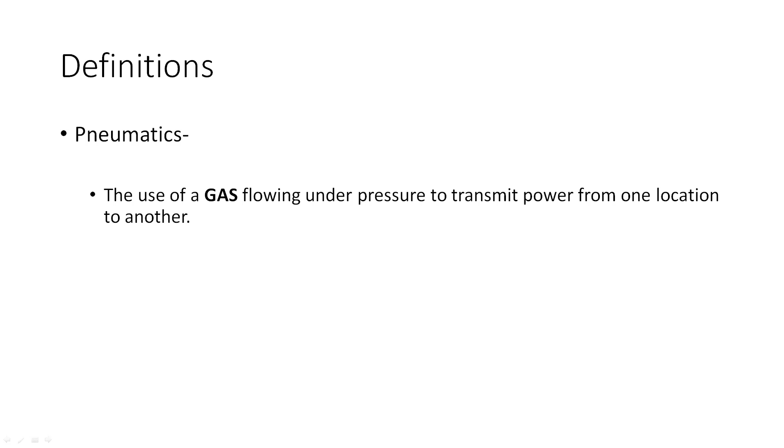Now, the most common gas, obviously, is air, and that's what pneumatic means. The reason is, first, it's relatively simple to control. You can make discrete things that move back and forth or actuate in a line, some kind of linear actuator, really easily. And the big advantage on robots, like on an FRC robot, is that you can have one power source control many applications.

By that, I mean you can have one compressor and reservoir system connected to several different solenoids to drive several different actuators in completely different directions. So if you need to power a lot of linear devices, pneumatics is probably a good solution for you.

It has a reasonably high power to weight ratio, meaning that I can get quite a bit of net power out of the system for the size of the motor that's driving it. And that's by virtue of the compressor storing some energy in a reservoir in the form of high pressure air. And the last thing, it's really safe.

Now, when you talk about safe, it doesn't have some of the inherent risks of hydraulic fluid, like flammability is one, or another one, probably less often thought of, is if I have an air leak, I just leak air on whatever I'm working on.

So if you went to something like a food processing line and you had actuated devices on that, air would be a good choice because, again, if we leak air on the food, the medium doesn't get destroyed. But if it was a hydraulic system and we leaked hydraulic fluid on it, we would destroy the product. So it's pretty safe from multiple perspectives.

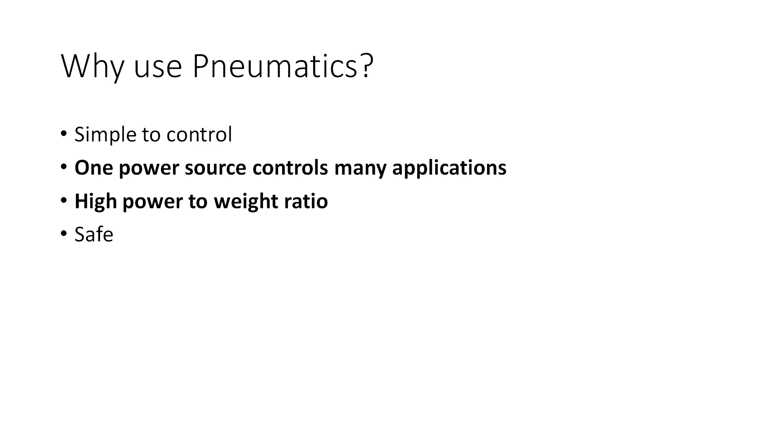So when we talk about typical pneumatic components, this is what we're going to look at, and we'll look at these in the sense of an FRC system. So we always need some way to generate or convert our energy from electrical or mechanical into compressed air.

So when we talk about converting mechanical power to air power, really what we're doing is we're typically going from electrical power through a motor to mechanical, through a compressor to air power. We also typically need to store our air power, under pressure, typically a pressure higher than what the system uses it at.

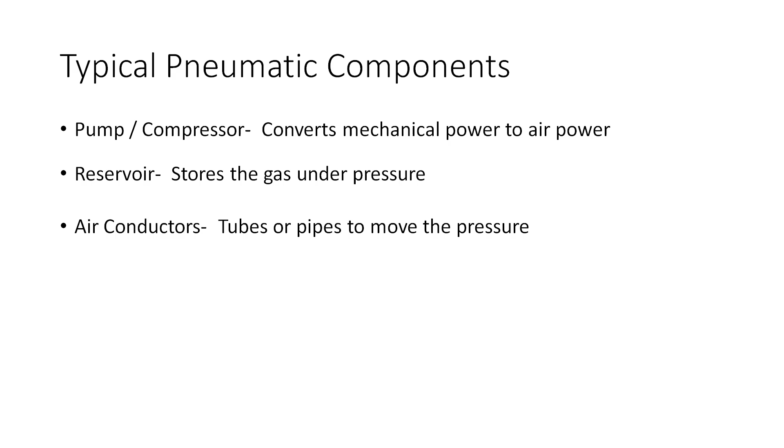We need some way of conducting that air. I say air conductors, these can be tubes, pipes, two of the most common systems, but that just moves the pressure from where it's stored to where it's needed to be used.

And we have some sort of valving or solenoids. This turns the air on and off. It controls both the flow and direction.

And then obviously when we get the air to where we need the power, we need some conversion method of converting that air pressure to mechanical movement or mechanical power. So those actuators we're going to talk about are going to be pretty much linear actuators or pneumatic cylinders. You can have a rotary actuator or an air-powered motor, but on robots they're relatively inefficient, so we don't see those very often.

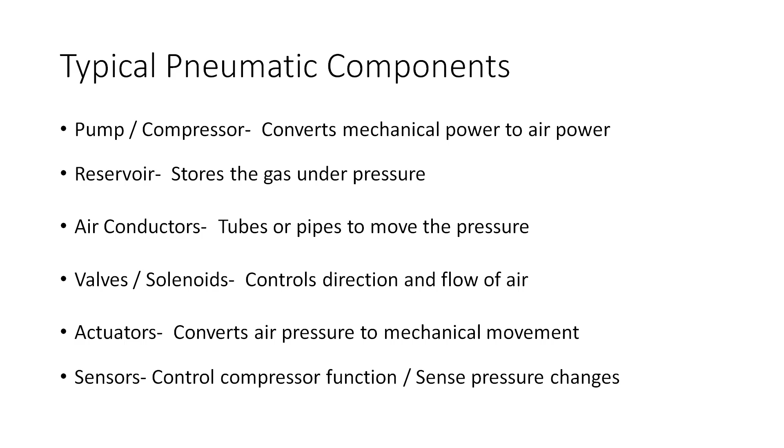And last, we need some sensors in the system. We need those sensors to tell the compressor when to turn on and off, and to do things like sense power or sense pressure changes in the system.

Now, typically, in an FRC system, we have these components: a compressor, a safety valve, pressure regulators, a pressure switch, a storage tank, tubing, solenoids, actuators, fittings, and some electronic controls. So let's look at those one at a time.

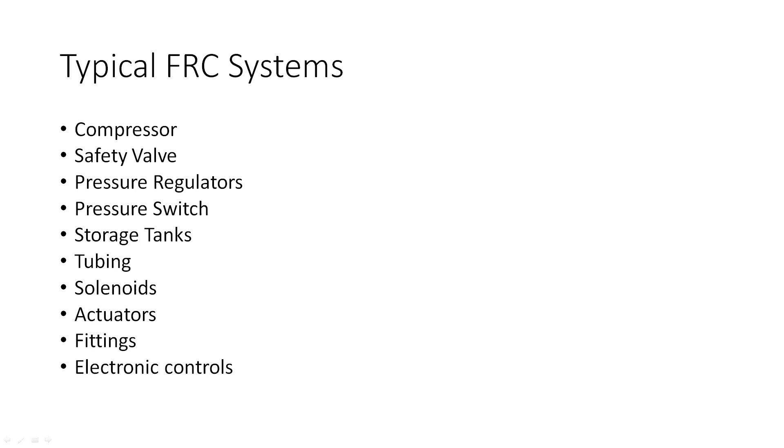Starting out with a compressor. This is a typical compressor. It's not the only compressor, but this is a Viair 90C. It runs off of a 12-volt battery. It's typically used in automotive applications, to be honest. Pretty low duty cycle compressor, not made to run continuously.

It gets really hot if it is run continuously, but it's turned on and off by switching the power through the software. This compressor is rated, I believe, up to 120 or 125 psi. That's what it will run at. That's its max working pressure.

Typically you're going to have an overpressure safety valve. This is one type, usually set right around 120 psi. Our system is set to turn the compressor on or off at 115 psi. That safety valve is there in case we have a failure in the electrical controls that doesn't turn the pump off. What that will do is port the pressure overboard through the little bleed hole at the top here. This is one type. There's also spring-loaded blow-off valves that we use.

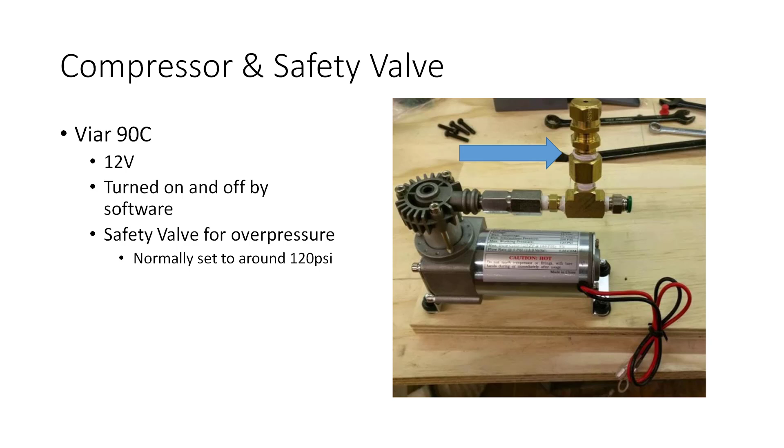Once we pump up that air, we need to put it into a reservoir. This is a very typical small volume, I believe it's a 35 cubic inch air tank, and the tubes just press fit into the ends. You can use as many of these as you want, daisy chained together. It doesn't matter which end the air comes in or out, since it's purely for your convenience how you plumb this, because it's really just a reservoir of pressure. This stores the air pressure at the compressor limit, which is 115 psi.

115 psi is not a real high pressure, but it's high enough that if you had a failure of this tank, it would be fairly catastrophic. These systems are typically designed at about a 2 times safety factor, meaning they're rated well above their service pressure. But even with that said, you would never want to impact, drop, or damage this tank. If it was dropped or damaged somehow, you'd want to just get rid of it. Don't keep it. When they do rupture, they rupture violently.

Another note: if you have a robot and you're doing battle bots, or even just an FRC robot, you really want to put this in a place where it's not going to be struck accidentally, because it will get damaged.

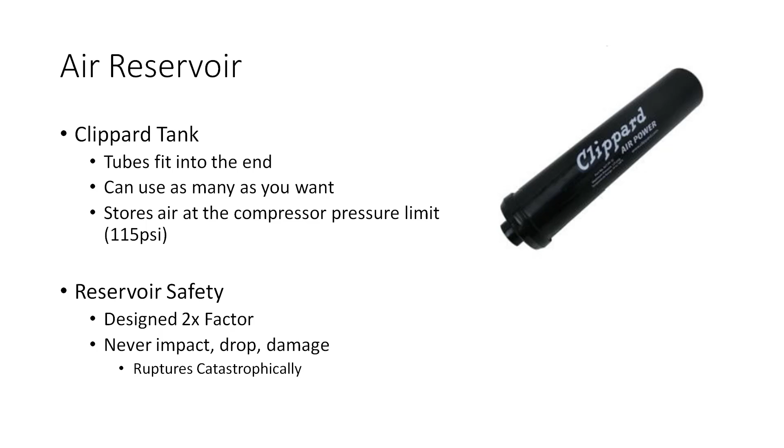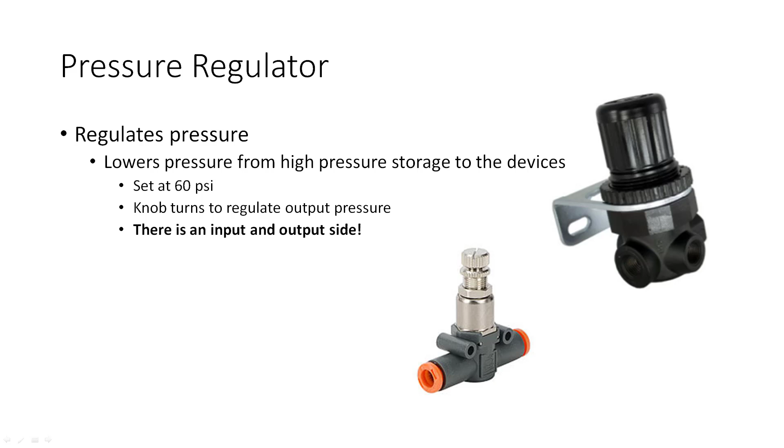Now, we do need to have a pressure regulator. I mentioned that the air tank holds pressure at 115 psi, but our system uses it at around 60 psi. So we have a pressure regulator that regulates the output pressure to the devices. The thing to note on these pressure regulators, a miniature one here, really neat compared to the big bulky one that rotates, the handle up here rotates up and down to increase or decrease the line pressure. But the thing about these is there's an input and an output side, meaning the air needs to flow from the in to the out. If you hook them up backwards, they just leak air and don't work right. That's one thing to note when looking at pressure regulators. You have to plumb them in the correct direction.

Now, in line we're also going to have some kind of pressure switch. This is a standard pressure switch for FRC. It's a normally closed switch, meaning that as soon as it hits 115 psi, the switch opens up. That's a safety device we use on a lot of compressor wiring like this. What it means is if the wire is cut or damaged, the compressor turns off. The wire needs to be intact in order for the compressor to run.

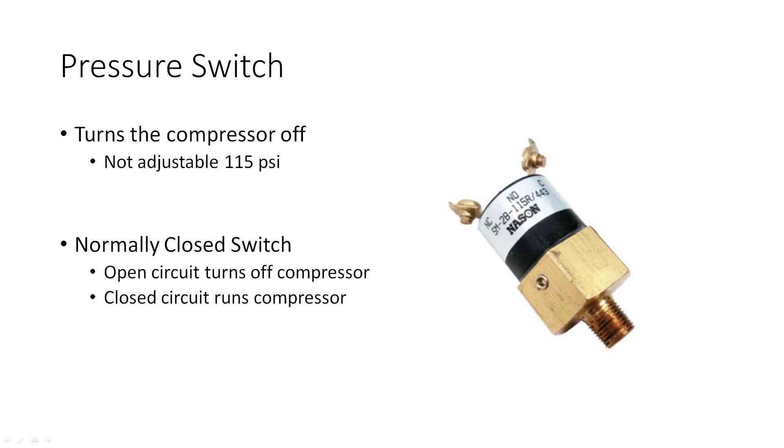This is just plumbed in on the high pressure side, the storage tank side, and it turns the pump off at about 115 psi. The tubing we use is press fit, 1/4 inch outer diameter plastic tubing. Its burst pressure is about 200 psi, again well above its service use of 125 or 60 psi, depending on which side of the tank it's on. You press fit this into the fittings. The only caveat is when you're using this, you've got to cut it square. If you don't cut it square, it's probably going to leak.

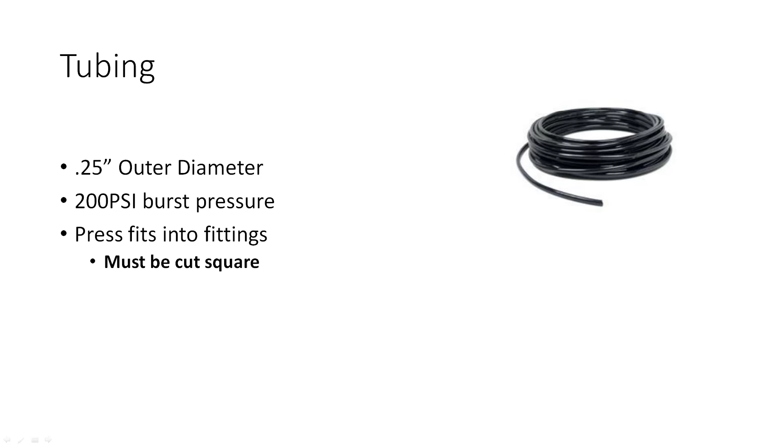Now, the solenoids we use basically control the airflow, and the way they do that is they'll send a pulse of electricity to pilot a valve back and forth. The valve body itself, the solenoid itself, is right here. That's what controls the airflow, and it goes through basically a manifold. This aluminum manifold will hold 3 of these solenoids on top of it. Then you've got input and output ports up here, your A and B ports, and air pressure coming in on one side and exhaust coming out the other. These are the exhaust A, exhaust B. We'll learn a little bit more about that in just a second.

So that's a solenoid. What we're allowed to do there is with 12 volts, quickly turn a pressure on or off to a circuit.

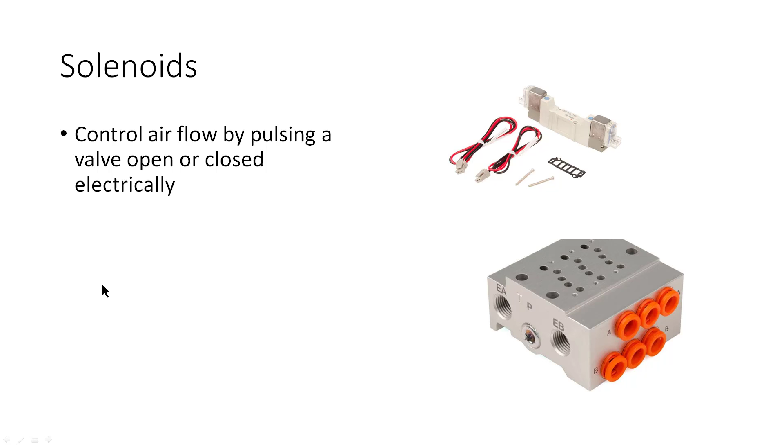Now here's an air piloted solenoid. This is showing you that in order to move this little spool valve, which is under pressure, you need to use some reasonable force, and that force comes from the air pressure in the system. With the solenoid, all that's really doing is releasing air into the pilot valve to drive this spool back and forth. That's what goes on with an air piloted valve.

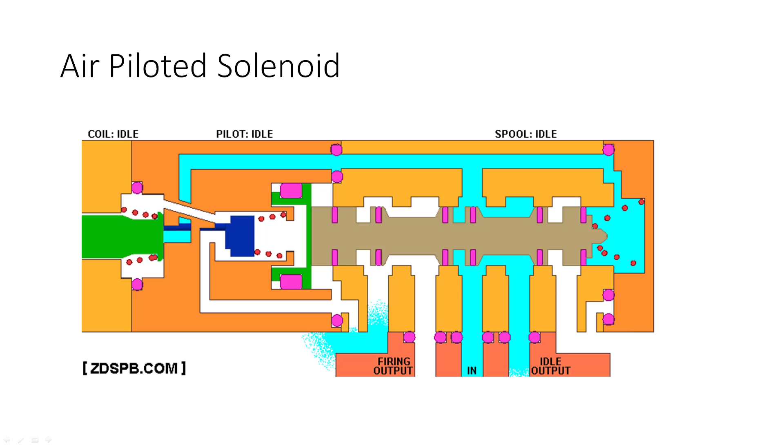That's really a novel solution to being able to switch the air on and off really quick, but the caveat here is it has a minimum pressure to operate on. The minimum pressure to pilot that valve is around 30 psi in an FRC robot. It depends on the solenoids you use.

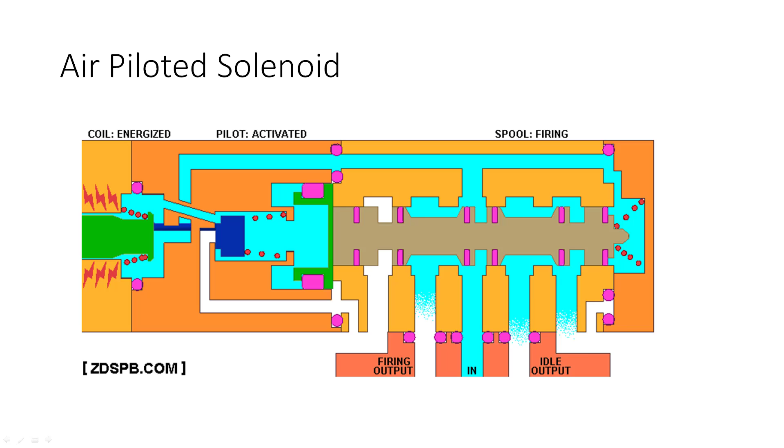Now our actuators come in almost every shape and size. This happens to be a standard Bimba round body stainless steel actuator. We define these by the bore size, which is the diameter of the piston, the stroke length, that's how long the rod will extend, and then the fitting size. So those are some major determinants about which pneumatic cylinder you're going to use.

Other things that you can look at is whether it's double acting or single acting. Double acting just means that it can push and pull. Single acting means it only pushes and it returns on a spring, or it could only pull and return on a spring too.

The last consideration for looking at your piston is how does it mount. This is a pretty standard piston. It's got the ability to mount on the nose with a thread, on the tail with a pin. A lot will also have a thread on the tail as well. So that's a universal mount.

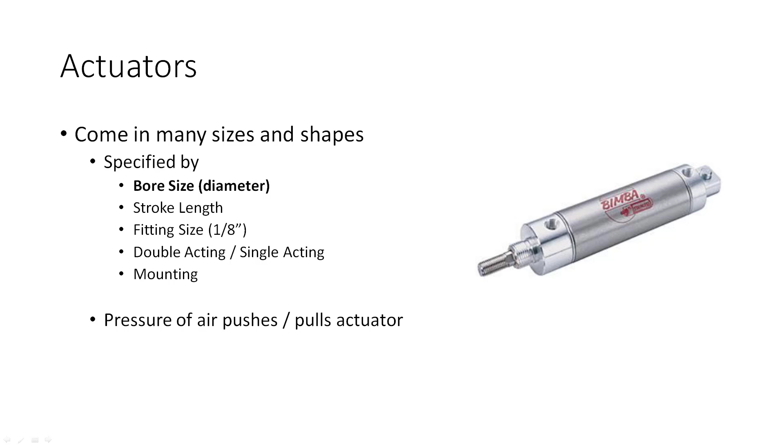So the pressure of the air makes that thing push or pull. Well, obviously for us to connect things, I need to have all these threaded fittings, and these threaded fittings fit into the threaded holes. They pretty much all need to have some kind of a sealant.

We typically use Teflon tape. When we put Teflon tape on these threads, a little bit is enough. I don't need to goober it all the way up and down. Too much Teflon tape actually can make it leak. So a proper application is maybe a wrap or two in one spot on a thread, not completely covering the whole thing.

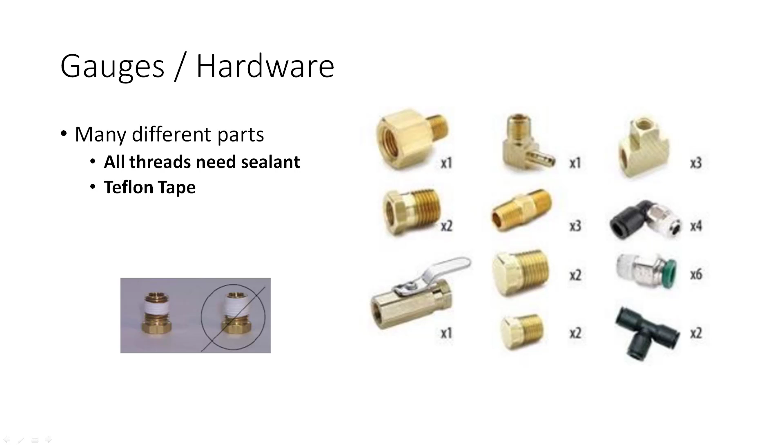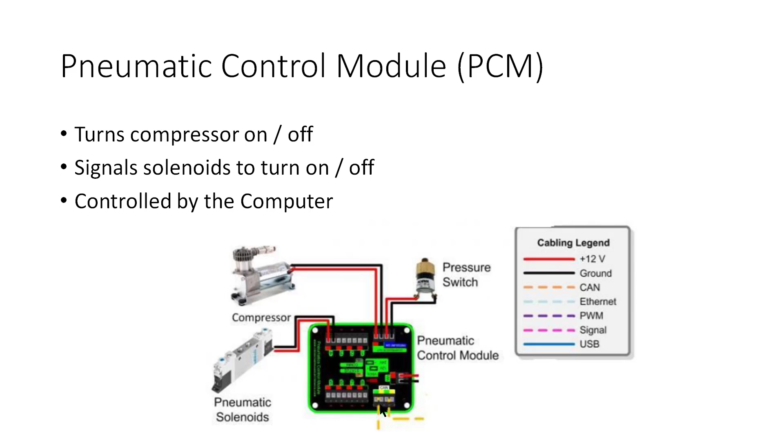Now the typical layout, physically of it, looks like this. You'll have a compressor, a relief valve, which is mounted right on the compressor, and then you go into a storage tank, over to your pressure switch and a high pressure reading gauge. Then through the regulator, this reduces the working pressure to 60 psi down here. So this is the working end, that's where we'll connect all of our solenoids, which in turn will go out to our devices.

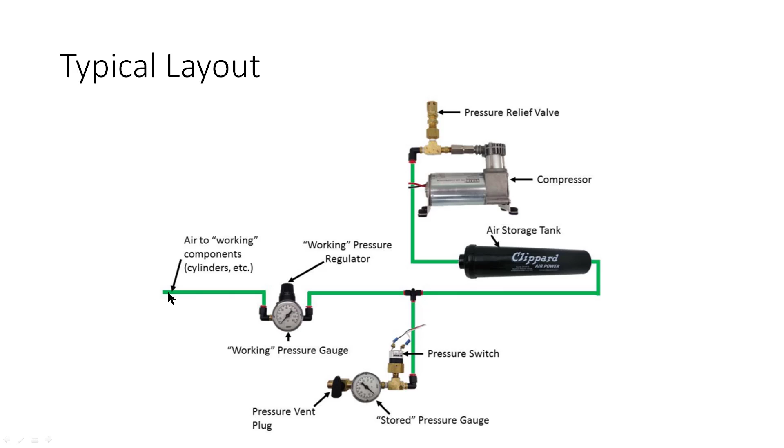Now let's revisit a couple of ideas. Remember that doing work is nothing more than applying a force over a distance. Now the only component of the force that counts is the component that goes in the direction of travel of the distance. So it's really force times distance.

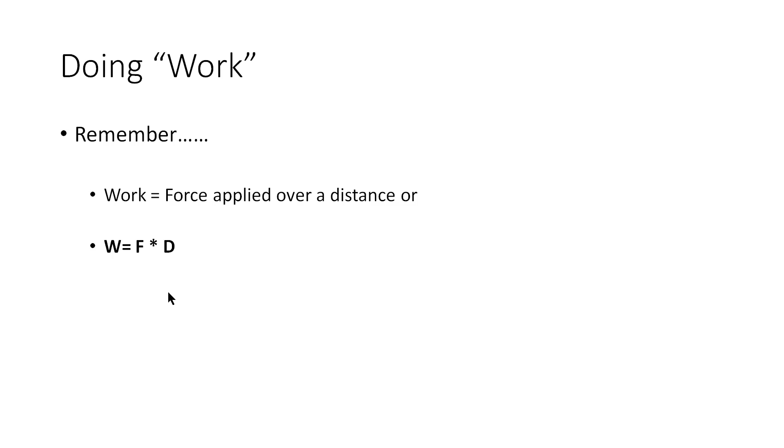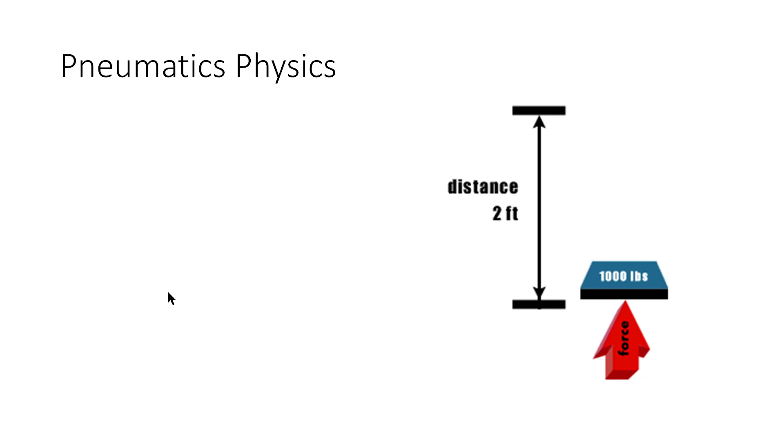Now when we talk about this in a physics sense for a robot, if I'm going to lift 1,000 pounds, which would be a lot, but I'm just using this as a simple graphic - if I'm going to lift 1,000 pounds of force, 2 feet, then the work to do that is that force multiplied times the distance. So we see work in terms like foot-pound or pound-foot, doesn't really matter, or pound-inch, or something like Newton meters. So in this example, if I lift 1,000 pounds 2 feet, I get 2,000 foot-pounds, or 2,000 pound-feet.

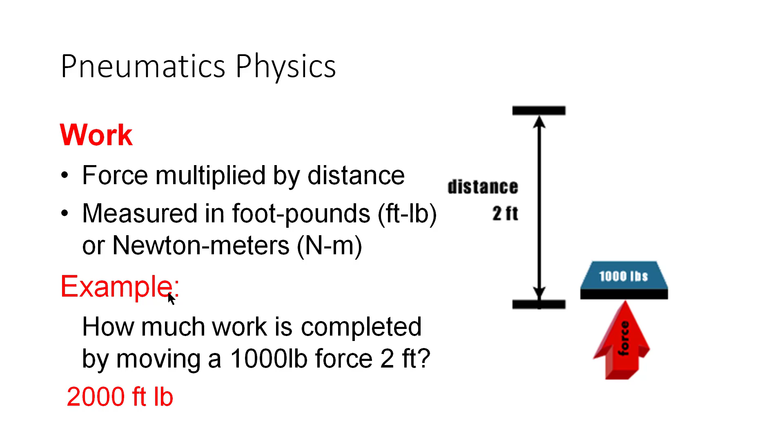Now, in pneumatics, the work is the force applied over the distance. That's really just thought of as the force of the piston pushing or pulling times the stroke of the piston. But that brings the question, how do I calculate the force in the piston?

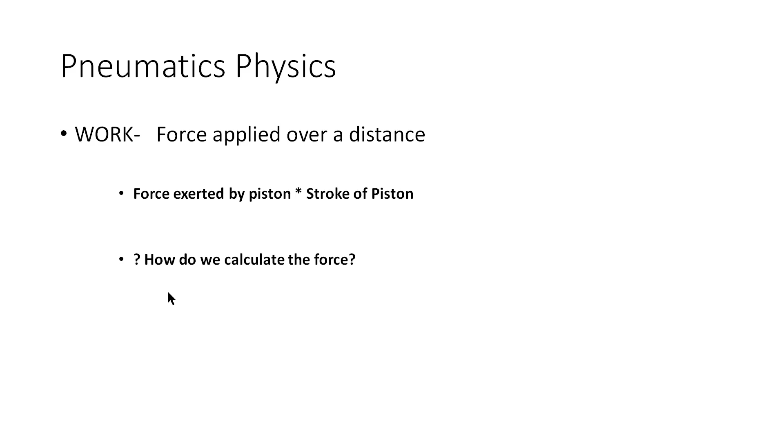We'll look at this piston in a closed position. On the bottom graphic, in red, you'll see the view of the inside of the cylinder, and here's the piston body. The inlet valve happens to be on the right-hand side, and that's what extends the piston. The retraction valve is on the nose side, and that pushes against the other way and pushes the piston in, retracting it. So that's kind of how that works.

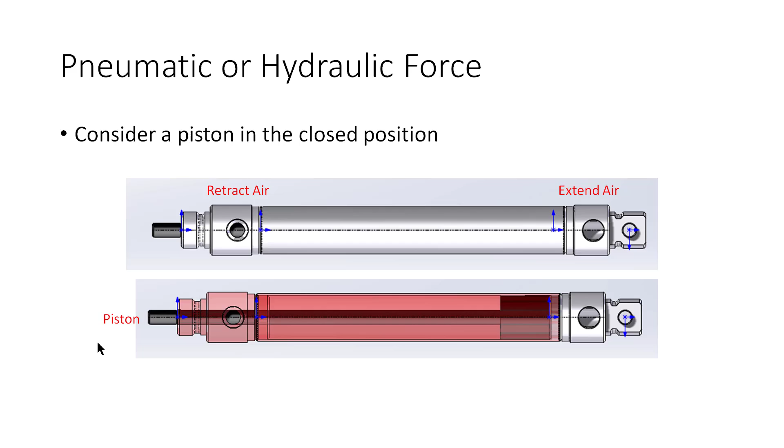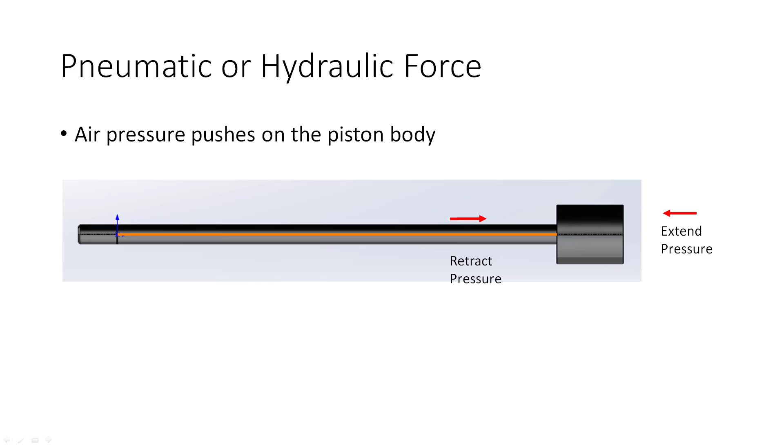So I've got air pressure, whether I'm retracting on the left-hand side of the piston, or I've got air pressure for extension on the right-hand side. When I look at the force I'm going to get out of that, that force is really the pressure of the air pushing against the area of the piston face.

The force is proportional to two elements. The first is the area being pushed upon. If I take a constant pressure, like 10 pounds per square inch, and push on 1 square inch, I get 10 pounds of force. If I double the area, I get 20 pounds of force. Conversely, if I doubled the pressure from 10 to 20 pounds per square inch and pushed on that same square inch, I'd end up with 20 pounds of force out.

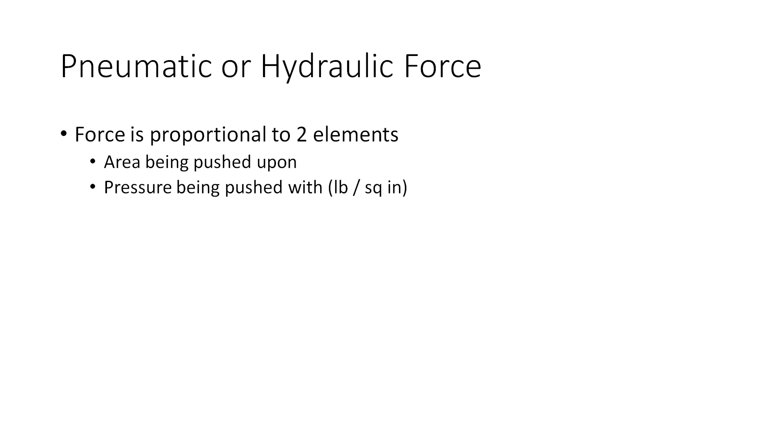So for our robot, the pressure is around 60 pounds per square inch on the working side. We don't really change that. And for a 3/4 inch piston, we've got to look at what the area is. So let's look at that.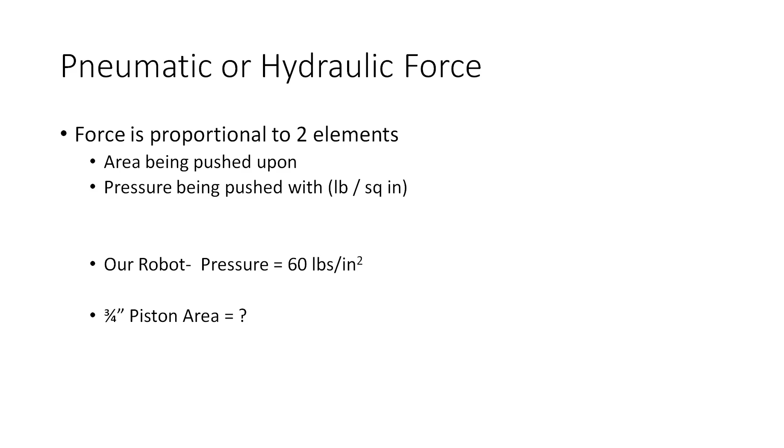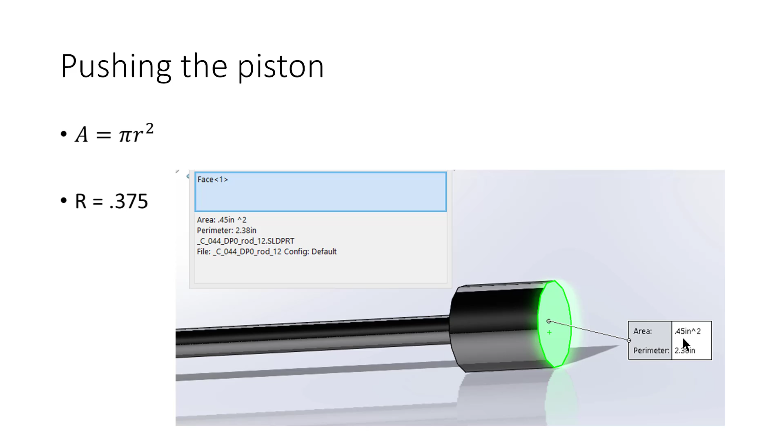Now remember, because there's a rod attached on one end of the piston, the retract side, the extend side is always going to be a little bit bigger in area. So this is a 3/4 inch piston with a radius of 0.375, and you'll find that the area of the piston is 0.45 square inches. So the force of this push is area 0.45 times 60 pounds per square inch, or about 27 pounds. That's how hard a 3/4 inch piston pushes.

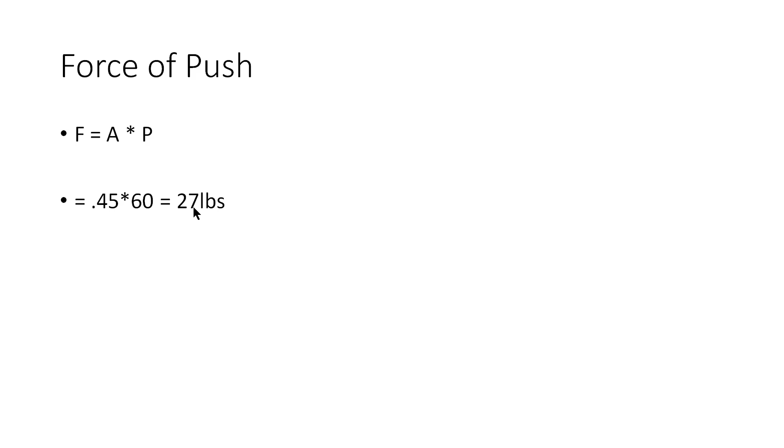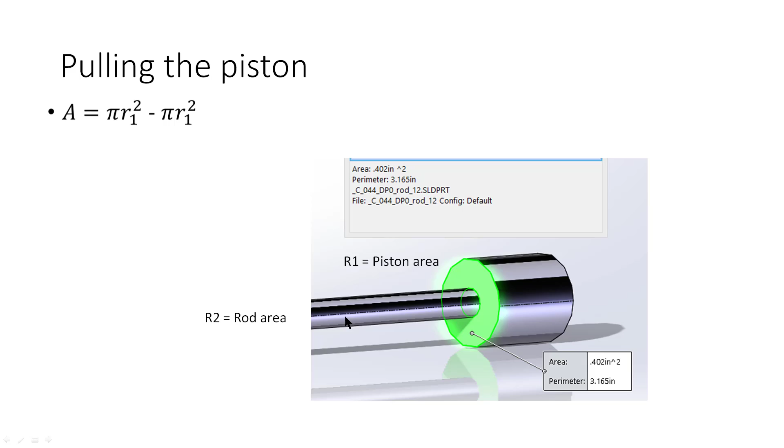So the next question is, how hard does it pull? Pulling is the same idea, except I have to subtract the cross-sectional area of the rod. If I do the math, the area is pi r1 squared, the radius of the piston, minus pi r2 squared, the radius of the rod. When I do that, I get about 0.4 — that's my area from the prior slide, 0.402, which we'll round to 0.4. So the force of the pulling motion is 0.4 times 60, or 24 pounds.

So what we see is when I push the piston, I get 27 pounds. When I pull with the piston, I get 24 pounds, a little bit less. That is inherent in every pneumatic cylinder — it pulls less than it pushes because the area of the rod is not counted in the area of application of pressure to generate force.

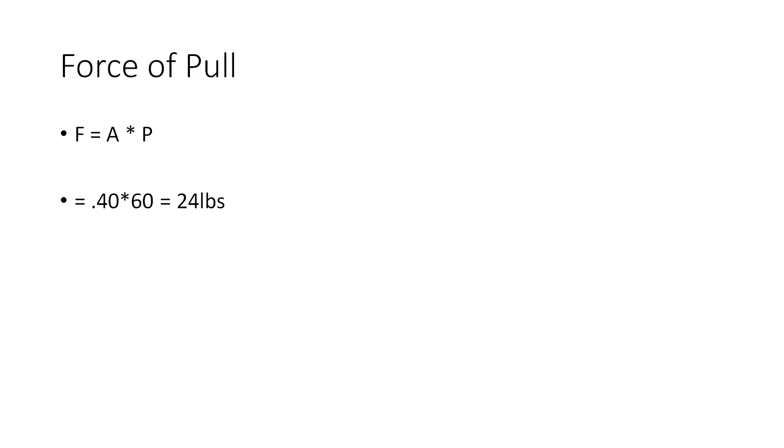So the next question is, what if I double the piston size? Well, when I double the piston size and get about 1.76 square inches, I generate 105 pounds of push. When I double that same piston, I get about 102 pounds of pull. So twice the diameter doesn't mean twice the force, it means 4 times, because I get 4 times the area — so 4 times the force.

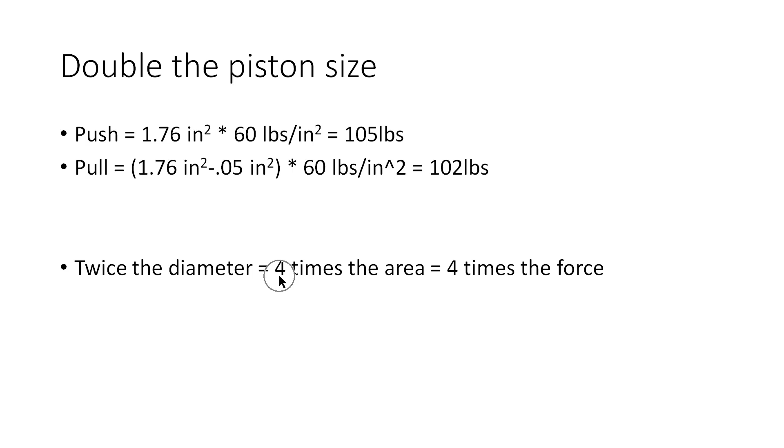So how much air does that take to extend the piston? That's easier than you think. The air used to push the piston out is the volume of the piston. So if this piston is 6 inches long, it would be 0.45 square inches, the area, times the length it's pushed, or 2.7 cubic inches. On retract it's a little less — 0.402 area on this side of the piston times the stroke, 6 inches, gives 2.412.

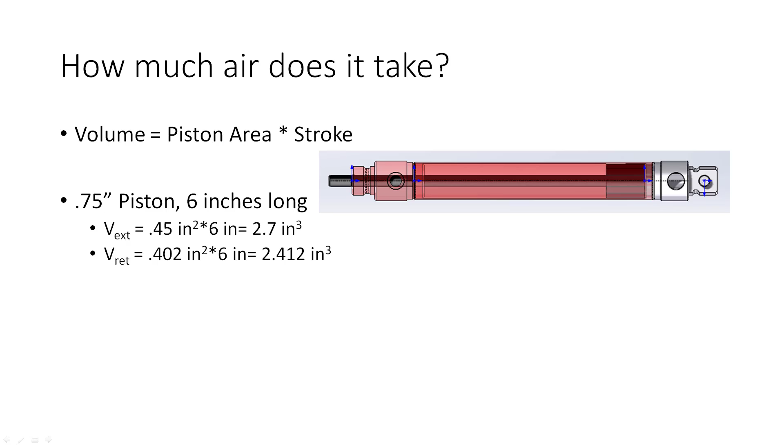Pretty simple, huh? So that's the idea behind calculating forces for the first part of this video. The second part, we're going to deal with how fast it moves or flows, and we'll look at the different pressure differential.

So remember, the area of the piston determines how hard it pushes at a fixed pressure. It always pushes harder than it pulls, and doubling my piston diameter doesn't double the force, it quadruples it because it's a function of the radius squared. Thanks for watching.